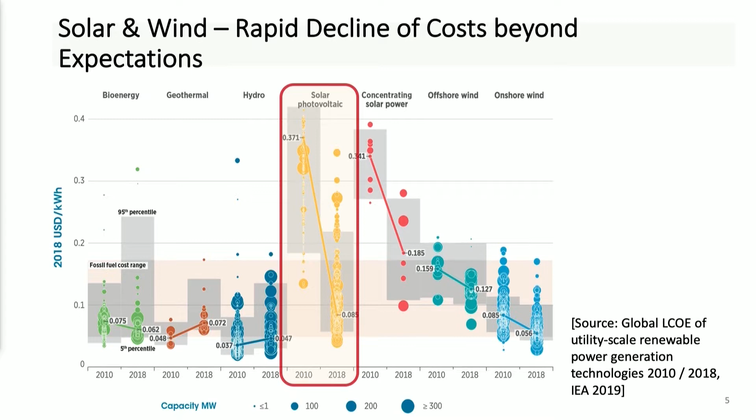This chart shows the declining costs for different renewables and the different technologies between 2010 and 2018. As you'll see there highlighted, for utility scale PV, for instance, the global weighted average LCOE has fallen by 77% between 2010 and 2018. Prices for solar PV modules have fallen by over 90% since the end of 2009, with a reduction of around 1/3 between 2017 and 2018 alone. Much of this reduction will prominently flow into projects commissioned this year in 2019.

In many parts of the world today, renewables already are the lowest cost source of new power generation. You can see that in the chart there. As costs for solar and wind technologies continue falling, this will become the case in even more countries. By 2020, onshore wind and solar photovoltaics, PVs, are set to join hydropower in consistently offering a less expensive source of new electricity than the least cost fossil fuel alternatives without financial assistance.

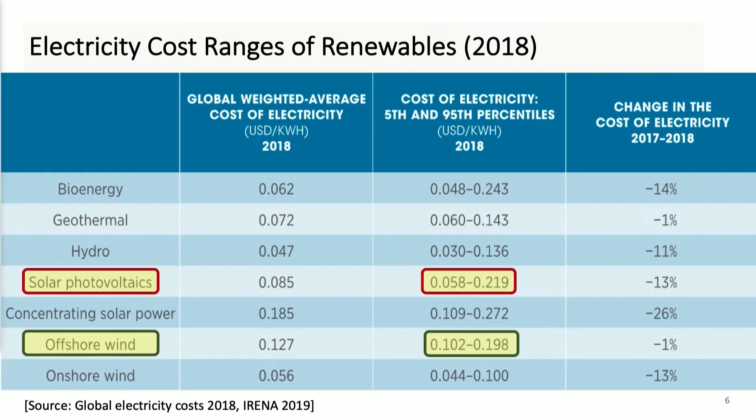This has significant implications for the cost of energy transition and likely pathways to decarbonising energy production and use beyond the electricity sector. Indeed, the declining and very low cost of electricity for solar PVs and onshore wind, as well as the cost reductions for concentrated solar power and offshore wind to 2020 and beyond, mean that renewable power is becoming the competitive backbone of the global energy sector transformation. So what's the share of wind and solar generation in selected regions of the world?

Let's start with the characteristics of wind and solar. Compared with conventional technologies, the two renewable energy sources have two main distinctive features. First, their cost pattern is characterised by high investment and negligible variable costs. Second, their operational output is governed by weather conditions, limiting their availability and causing mismatches between supply and demand.

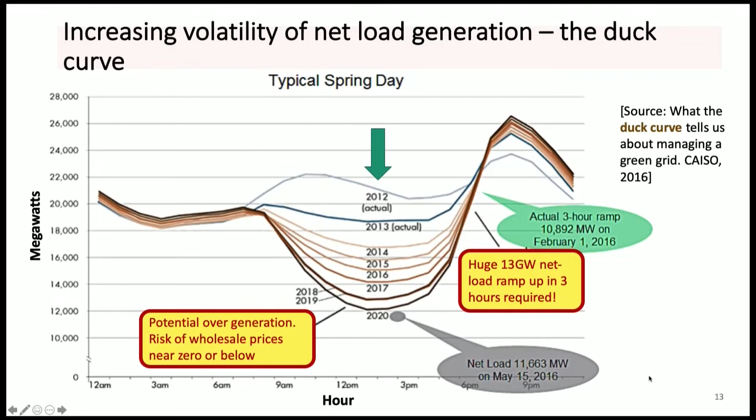The result is huge changes in demand for baseload power generators over a short period of time. In this example, a 13 gigawatt net load ramp up was required in 3 hours in the afternoon when the solar output decreased. Traditional coal power plants, particularly older, more run-down power plants, can't quickly be turned on or off. They need longer ramp-up and shutdown periods, and are not fast enough to react to the quick, constant changes of wind and solar output.

So these plants have continued running at certain levels through the trough time, and of course producing pollution when they do so. This leads to potential overgeneration in the trough, sending wholesale prices down to near or even below zero. Wind and solar have in effect driven down the cost of daytime energy so far that they threaten to make reliable coal-fired power stations, which are essential at the moment for baseload power, unprofitable well in advance of their natural shelf life.

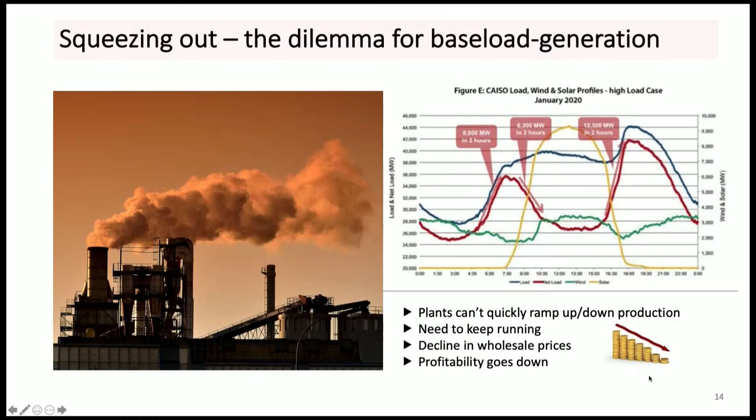Rising electrification in the transport sector, new data centres, the Internet of Things and others will lead to higher demands in baseload power in the foreseeable future.

Ask any person under 50 in the street where they store their movies, pictures, corporate documents. It'll be on the cloud, in a data centre gobbling up power at rates unheard of a few years ago. Every application offers you cloud storage, antivirus software now, games, and I have a cooking app at home that offered me free storage. For governments and energy policy, this is a dilemma.

So let's have a look at Australia, Japan and China and how they're planning to secure their baseload generation in the foreseeable future. In Australia, optimistic output forecasts for renewables and increasing economic pressures led some operators to decommission some baseload power plants in recent years, namely Hazelwood in Victoria.

This caused significant stress for the grid stability and led to repeated outages in periods of peak demand, particularly in summertime with high demand for air conditioning. Power shortages for several 100,000 households have been the result, the last one being on January 19 this year in Victoria. Considering this, the previous Turnbull government in 2018 started promoting the establishment of new coal-fired power stations.

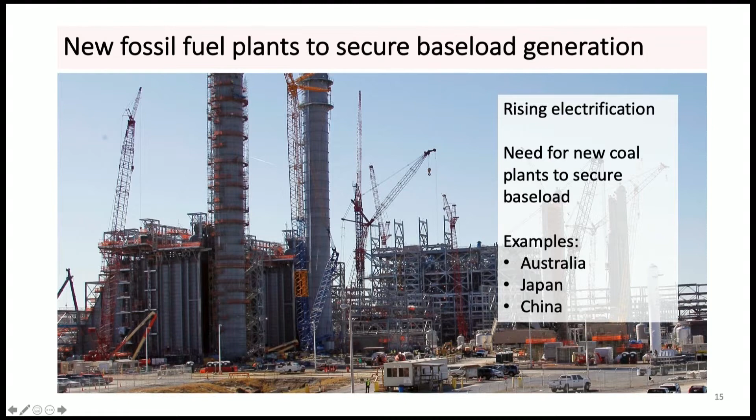They also commissioned the Snowy Mountains Pumped Hydro Scheme, a 2 gigawatt monster of a project that is already experiencing massive cost blowouts. Japan is the most vocal proponent of hydrogen economy and green power. Despite this, it's fired up at least 8 new coal-fired power stations in the last 2 years. It has plans for an additional 36 over the next decade. The biggest planned coal power expansion in any developed nation, not including China and India.

Last month, its government took the key step of locking in a national energy plan that will have coal provide 26% of Japan's electricity by 2030. They abandoned the previous goal, which was 10%. The reversal is partly a result of the 2011 disaster at Fukushima, which punctured public support for nuclear energy.

Critics say the coal revival has alarming implications, and they're right, for air pollution and Japan's ability to meet its pledge to cut greenhouse gas emissions, which account for 4% of the world's total. If all the planned coal power plants are built, it will be difficult for us to meet our emission reduction goals, said the Minister of Environment Nakagawa earlier this year.

And in China, despite shutting old plants, mainly because of pollution issues, new plants are more than replacing lost output, resulting in still rising power outputs from coal. So they're shutting down smaller, inefficient plants, and they're putting up plants with 4 to 5 times the power and 4 to 5 times the pollution. At the same time, as renewables squeeze baseload generation, they put themselves under stress.

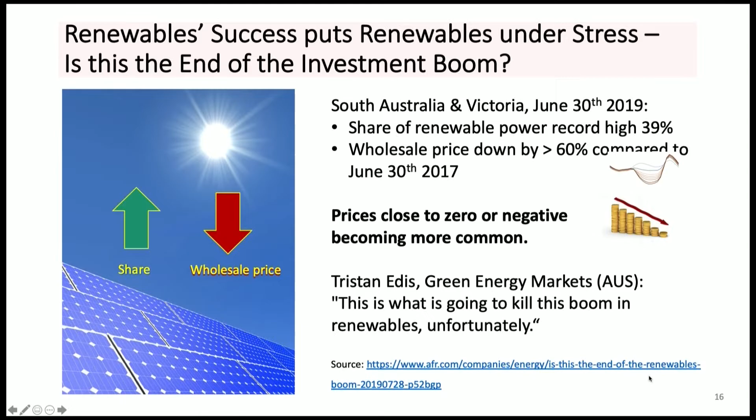The massive influx of renewables into the national electricity market in Australia, as an example, has triggered warnings that the end of the investment boom in wind and solar could be approaching, as the economics of some plants are exposed to wholesale prices. They are being deeply undermined. The new figures released at the beginning of August 2019 by respected analytical firm Green Energy Markets found that in Australia, the total solar power generation doubled in June compared with 2 years previously.

On June 30, the share of renewable power fed into the grid in Victoria and South Australia rose to 39%. Average wholesale prices were down, however, by 60% on that day compared to the same day in 2017, and more than 40% lower in New South Wales and Queensland, according to the Australian market operator data. That leaves not only coal, but also prospective renewable plants potentially vulnerable.

Tristan Edis, Green Energy Markets Director, expects zero or negative prices on the national electricity market in Australia to become a lot more common in the next 12 months across states other than South Australia. He said that this is going to kill this boom in renewables, unfortunately, in the Australian Financial Review in July.

So this leaves us with a key question. How can we further increase renewables and at the same time address problems with baseload generation? We believe the solution to this dilemma lies in energy storage at a large scale and later use in baseload power generation. So let's have a look.

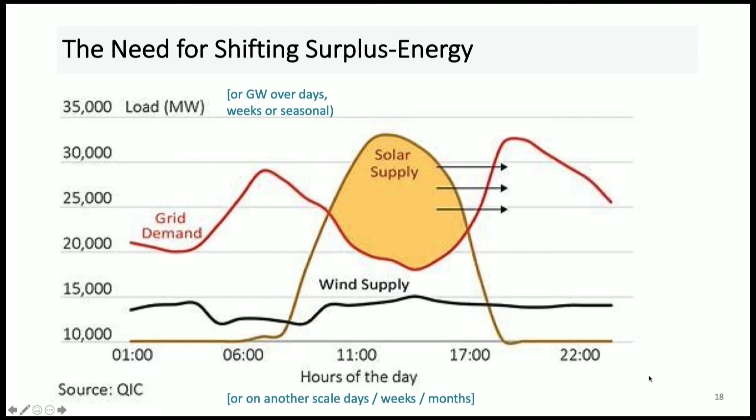It makes a lot of sense to store surplus energy, as previous speakers have said, from renewables and dispatch to the grid at later times when renewables can't match demand. We need to balance not only daily but also weekly, monthly, seasonal variations of renewable energy production. So what are the options to store and dispatch energy at different scales?

These are the currently available options for energy storage in different sizes, from kilowatts to gigawatts to terawatts. They're also in relation to different discharge times, storage times. What we need to solve the problem of the duck curve is gigawatts to terawatts of storage, for discharge times of days and up to months.

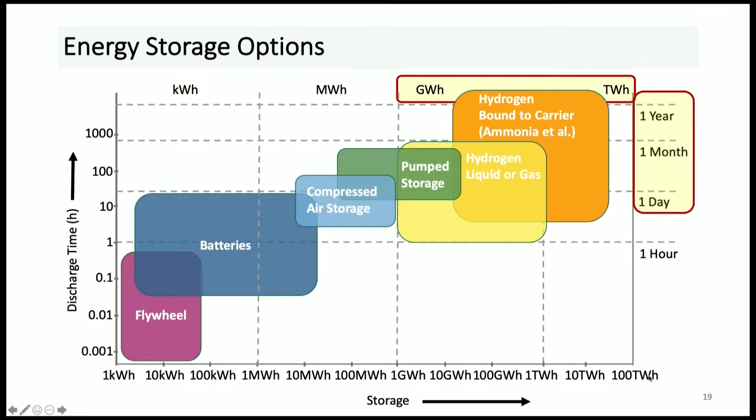So you can see on this chart there that, when you look at batteries compared to air pump storage, hydrogen comes out to be a very, very useful gas indeed. When looking at this chart, you can see that the only clean, zero legacy, feasible option for this size storage is hydrogen, either in pure form or bound to other carriers.

Hydrogen promises to become the low-cost option for storing electricity over days, weeks or months. Excess electricity can get converted to hydrogen using electrolyzers and back to heat or electricity when needed. Besides electrolyzers, there's a number of technologies in development that might provide additional or better options to produce hydrogen, alternative to the use of electrolyzers. In fact, straight after this conference, I'm going to see a very exciting development right here in the USA.

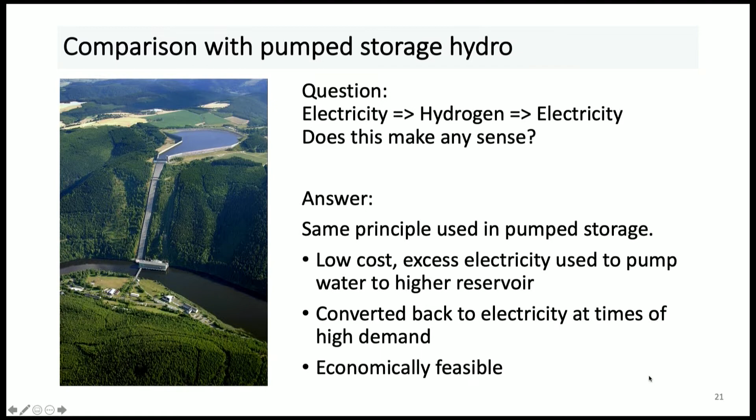Without having the time shift application in mind, it might at first seem counterintuitive to use electricity to produce hydrogen and then produce electricity again. But the reality is, it's the same principle that's been used in pump storage hydro for decades. Low-cost excess electricity is used to pump water to high storage reservoirs and then converted back to electricity at times of high demand. Whilst the efficiencies look dodgy, the economics works, despite the loss of energy in both steps of the conversion.

In the same way, with even larger storage capacities, hydrogen can get generated and stored at times when the power supply exceeds demand and prices are low. The stored hydrogen can then get converted back into electricity when supply does not meet demand and the wholesale electricity price is high. Hydrogen is extremely versatile.

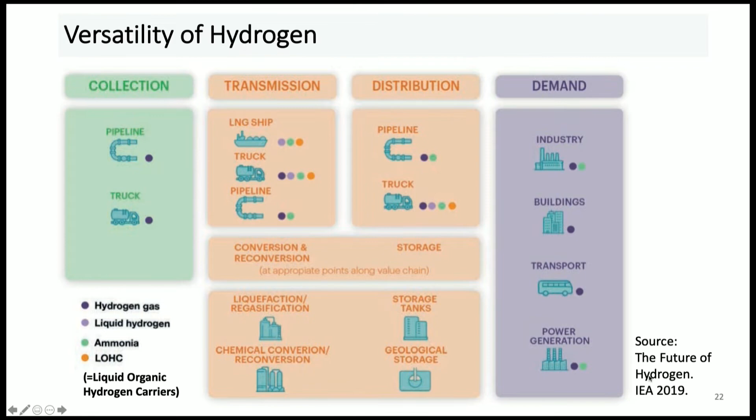Depending on the need, hydrogen can be stored as pure hydrogen, pressurised or liquid. It can get bound to carrier substances like nitrogen to form ammonia, metal hydrides, or oils, for example, like toluene, which is a potential option for the use in transportation. It can be transported, distributed with trucks, ships or pipelines. It can be stored in tanks or caverns, as they do in Leeds in England, and Leeds is 60% hydrogen now, all their gas. And it can be used for many different applications in building heating, industry, transport, and power generation.

In the future, a low-carbon world, hydrogen can effectively enable the storage and the trade of wind and sunshine between different regions. Hydrogen generated in regions with abundant solar and wind resources, such as Australia or Latin America, can get exported to regions with high demand thousands of miles away. In this way, it replaces fossil fuels as a tradable energy commodity, and that is vital. The world energy commodity relies on energy movement to keep the balance of M1, M2 and M3 and the money cycles working.

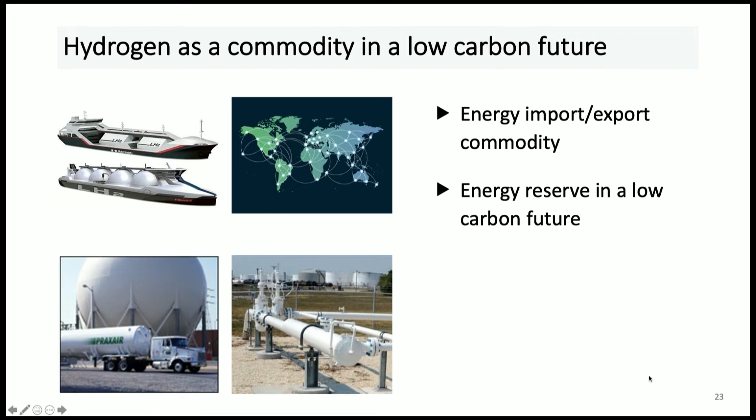Hydrogen can also provide an additional way for countries and industries to store reserves of energy strategically in a highly electrified, low-carbon world, similar to fossil fuel reserves today. Using hydrogen instead of carbon-containing fuels, end users not only cut CO2 but reduce local air pollution by completely eliminating particulates, sulphur oxides, nitric oxides, ground-level ozone and other toxins, thus improving environmental and health outcomes. Urban air pollution and its related health impacts are now major drivers of energy policy decisions, and governments are clearly interested in ways of reducing pollution and fixing air quality.

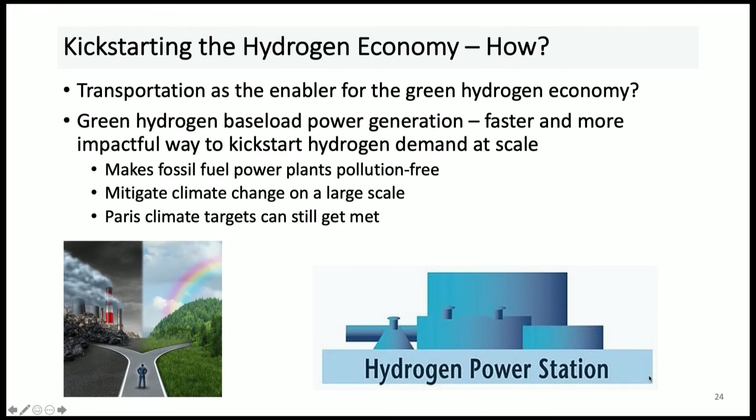Many have talked about the transportation sector as acting as the enabler for the hydrogen economy. But we think using hydrogen for baseload power generation is a faster and more impactful way to kickstart the carbon-free hydrogen economy and stop pollution and help mitigate climate change on a large scale and quickly.

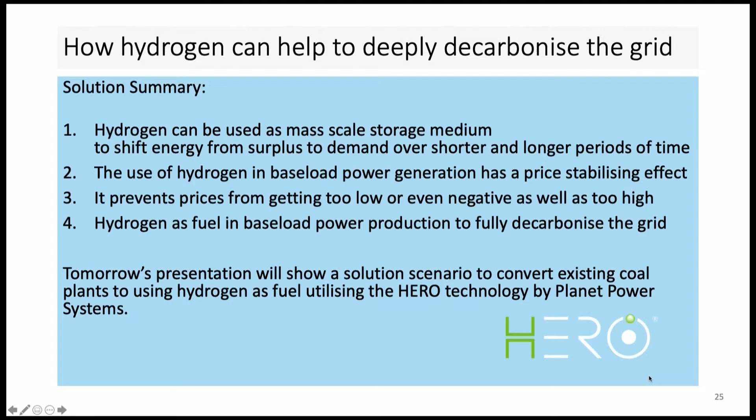In essence, storing surplus energy and shifting it to times with unmatched demand has a price stabilising effect. It prevents prices from getting too low or negative in times of high supply and prevents prices spiking too high in times of lower supply and high demand. It therefore can effectively counter the duck curve formation and allows for a further increase of solar and wind capabilities.

These added capacities in solar and wind don't necessarily have to be connected to the grid. Setting up solar and wind farms for dedicated, off-the-grid hydrogen production increases the load on the electrolysers, which leads to better efficiencies and economies of production of hydrogen.

This has been demonstrated by the approval, just a few days ago, and the independent bank funding of a 15 gigawatt combined wind and solar hydrogen park in Western Australia.

Hydrogen production and storage on a large scale can be utilised to replace fossil fuels in baseload power and allow further decarbonisation of power generation. It can solve the economic distress provided by the duck curve.

So how can hydrogen be effectively used in the production of baseload power? That's more of a topic for tomorrow's presentation. It'll show you how HERO technology allows the conversion of existing fossil fuel plants to run on hydrogen and thus become free from pollution and CO2 greenhouse gas emissions. Converting existing plants allows them to extend their lifetime and prevent stranded assets. In total, we're talking about $1 trillion worth of infrastructure that people currently want to throw away.

HERO can not only be used to convert existing coal plants, but can also run at high efficiencies in new plants, preferably using closed-loop gas turbines running with supercritical CO2 or helium, as Siemens is developing in Europe.